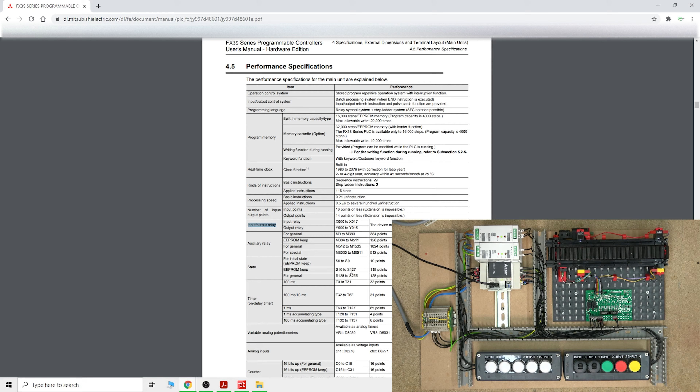Let me move that along now. Let's load up the PLC and have a look at what we are going to be working on today, and also let's load up our FX3S PLC.

Another way to check how many timers you really have, how many of everything you really have available for the PLC - if you go to batch monitoring and let's say enter T0, it's going to show you what is available for this specific PLC. As you can see down here, it goes all the way to 137.

They are not all the same, so definitely make sure - as I already showed you in the manual - they are not all of the same. So pretty much this PLC can have 137 timers. I'll put T98 for whatever reason.

Let's have a look at C0, how many counters - we can only have 31 counters. And in the manual here it will explain what each counter is. There's high speed counters and things like that. We are available from C0 to C15.

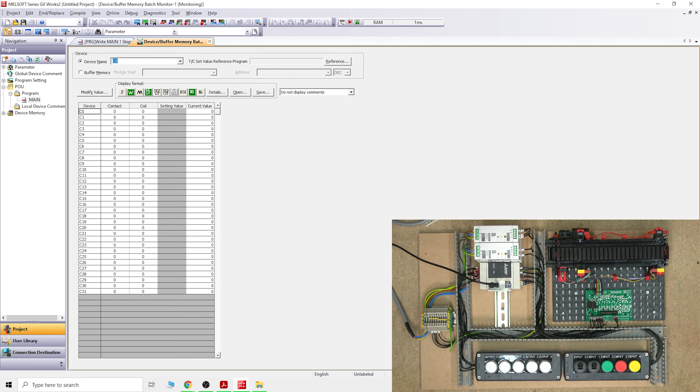We have up counters, and then we don't even have - yeah, we only have very basic. What we can have, basically for general use, is only from C0 to C15. And the 16-bit up EEPROM keep counters will be from C16 to C31. But again, we're going to look at that some other time.

Anyway, we are getting off the subject. So what is our subject today? We are looking into the timers today.

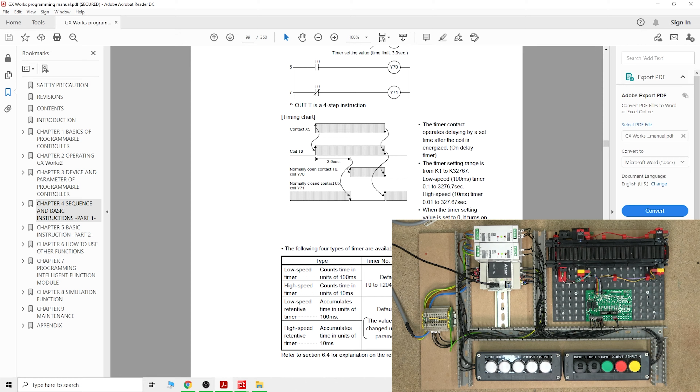And to progress in our manual, this is pretty much the timers in here, and this tells you what's possible and what's not, because this is a general GXWorks manual, so it tells you how many timers are possible, all the way to 2000, which in our controller it's only possible to have 137 timers. So they all differ according to specifics.

So let's have a look how the timer actually works. So for a normal non-retentive timer, this is the one we're going to be looking at today.

If let's say we use M0, and then we type in T1, then you need space, and then K, which is constant. K1 will mean 100 milliseconds. So you need to select the right value - K1 will actually be 100 milliseconds, and if you want to go for 1 second, you need to go for K10 or K20 or similar, since 1 second is in tens, so you can break it down yourself after that.

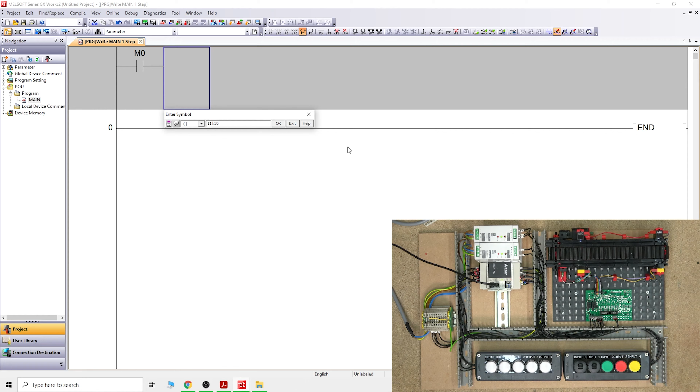So let's go for K30, so that'll be 3 seconds. So once we F4 it...

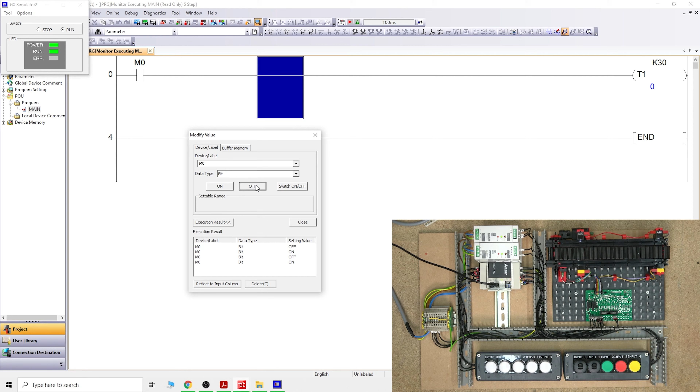So we are going to go into a simulation. As you can see here, if you want the timer to go, it needs to stay on. As soon as you turn it off, it will return back to 0. So, on, and it will return back to 0.

So pretty much every time we want to use the timer, we need to make sure that the bit stays on for it to run, and then obviously it would need some form of way of turning it off. So that's pretty much what we are going to be working on today.

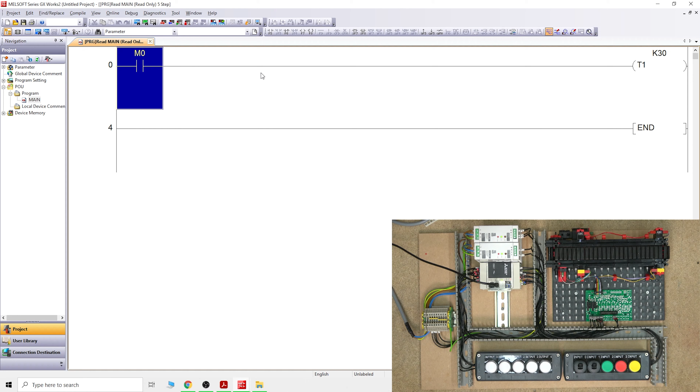So our project starts with, as you remember if you watched the last couple of videos, you know what our X's are already on our little controller in our video. Is it still available there? Where is our video? Yes, let me just lower that one down. There's my little controller down there.

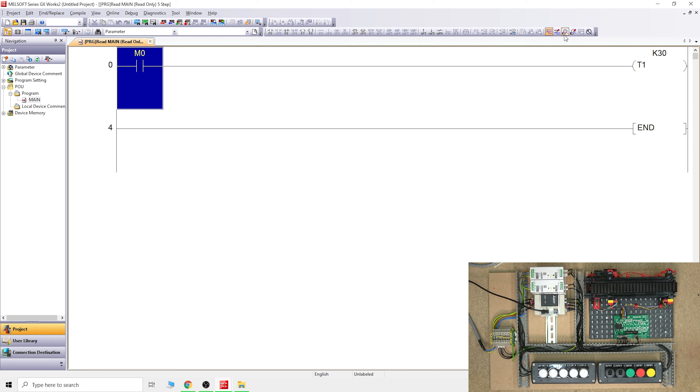So X3 is going to be our start button. Let's go for... no, we need to go to the right mode. There we go. So X3, it's going to be our start, and again, as usual, we're going to be requesting the labeling. So X3 start, let's go with the small ones.

And then we're going to use internal bit M0 for setting it, the bit on and staying on, because we aren't going to be holding the X3. We already looked at the set instructions last time, so if you haven't seen that, definitely check it out.

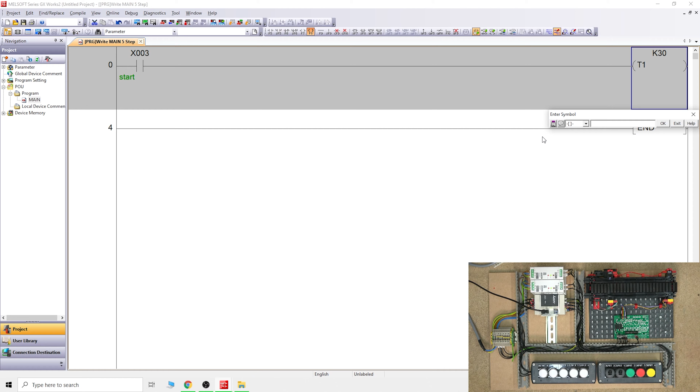So we're going to go for set, space, M0. You pretty much tell it what you want to set. And there we go, so now the M0 is set.

Oh, I forgot to name it. We're gonna call that one as start T0. I'll call it like that. Why not? Here we go.

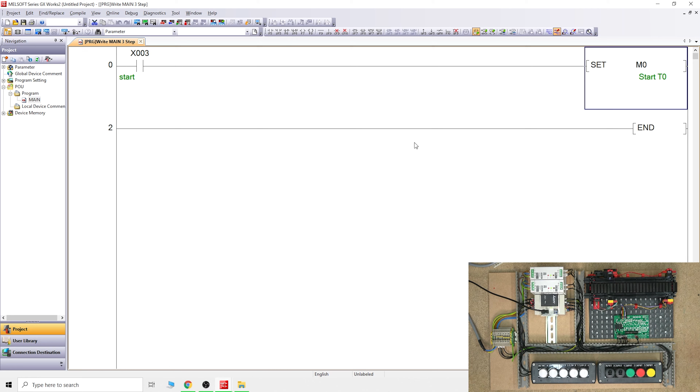Start T, not T0. So the next one, we need to start the actual T0, which is going to be M0. And we're gonna say, we're gonna coil. Remember, the timer is a coil itself, it's shown in the manual. So we're gonna say T0, and again space, and as I said before, how many seconds?

K10 will be 1 second, K20 will be 2 seconds, and so on. So we're gonna say K, let's say 30, why not, so 30, let's time it.

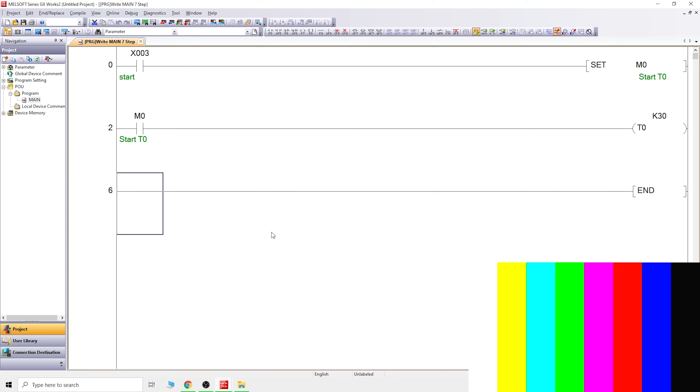So now our timer is on, and a timer can, after it runs out, turn something on. So the next thing we need to do is create what we are going to be turning on. So T0 is becoming a contact now. So that's going to be T0.

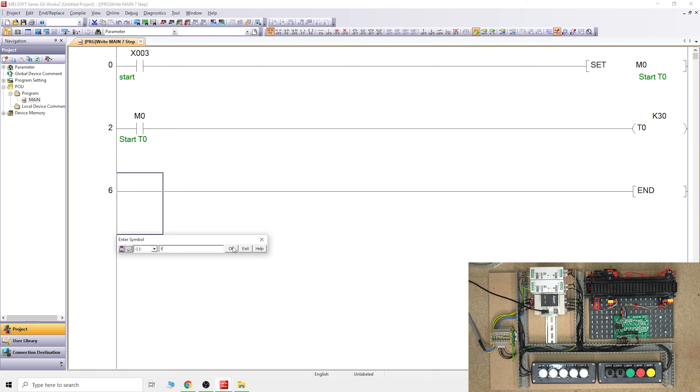And what do we call that T0 actually? We're gonna call it 'start delay on', why not, something like that, just to give us a bit of an understanding of what is going on.

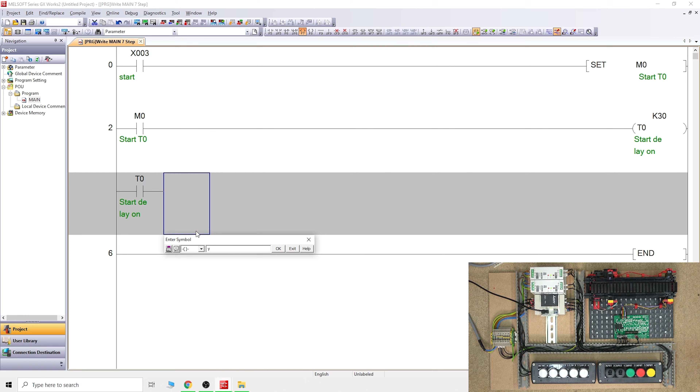And what do we turn on? The actual coil, which is, remember from our last videos, not in there, in here. We're gonna turn on Y0, and that will be our - keep forgetting - that will be our 'run forwards'. Here we go. So that way we F4 that one, and that way we have created an on delay.

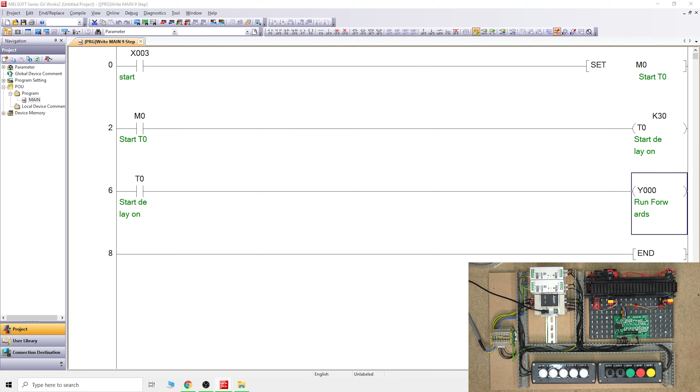Next, we need to create off delay, the same one. To do the off delay, we do exactly the same principle. It's just this time we're going to use X4.

X4, we're going to call it stop. And we pretty much will repeat the same thing. So we need a new different internal bit, actually the contact. So we're gonna call that...

Set probably, let's go for M. What do we have? M1, one we have not used already. So M1, let's click that one on, and M1 is going to be what do we call it, a stop delay on.

And from there on, obviously we're going to use that one, M1, which is already what we have. And what are we doing? We're going to be activating the timer, which is going to be T1 this time, K30, 3 seconds.

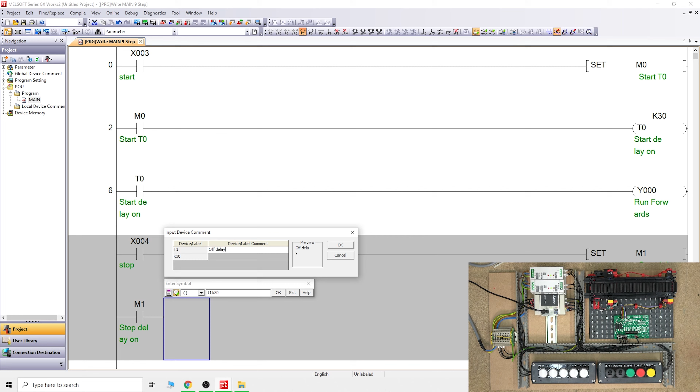Here we go. Off delay timer, let's call it like that. What you call them is down to you. And then T1.

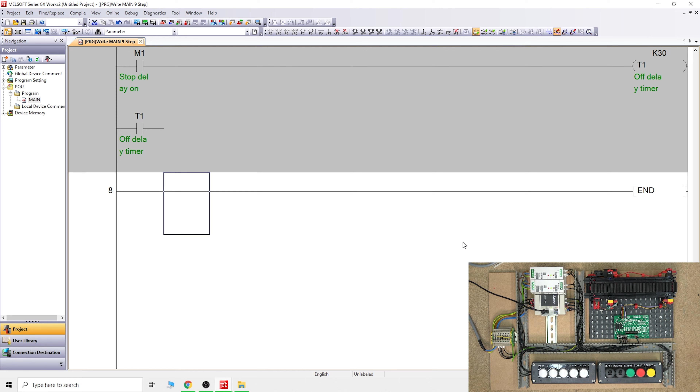No, we need to select the contact, so we're going to say T1 timer. And what are we doing? We are actually going to be resetting the M0, because remember that is still set in there, and obviously we still need to reset our M1 as well.

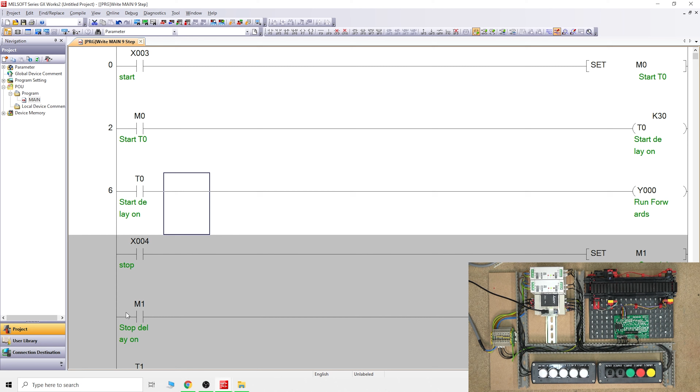So pretty much that's what we're gonna do, because at the moment, as you can see, the set will run the timer and keep the timer on. So we need to reset it to stop the timer and reset back to 0. We need to remove the power from it, or remove the contact of it. So that's what we're gonna do.

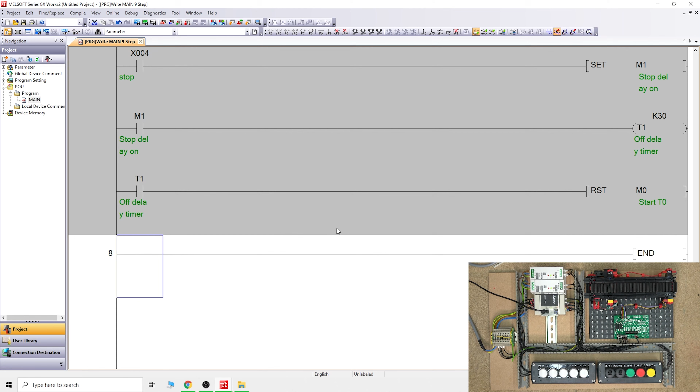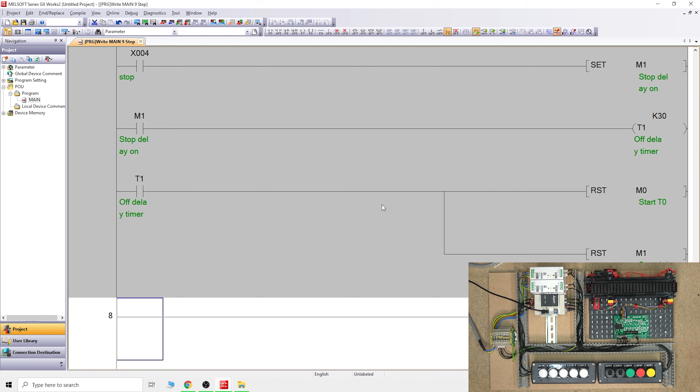We're gonna create instructions called RST, and then we say M0, which is basically M0 to a reset the start. And we are also going to be creating another reset, and that will be for M1. RST M1. So here we go, we already know what that is, and that's, ladies and gentlemen, we have created the on delay and off delay.

So the next thing what we need to do is we need to check it out how that works. And as always, how that works, we need to go to a simulator before we load it into the controller. So let's close that one, there we go, so let's go to X3.

Let's click the X3 on. After 3 seconds, as you can see, the Y has stayed on. So this is basically on delay. So then we need to go for some form of off delay, which we did around it.

Oh yeah, don't forget to turn that one off. And then to turn it off, as you can see, as soon as we click the X4, M1 is set on. And here we go, it has reset the... I need to make sure that one is off. Reset the timer for the start and timer for the stop, and both of them are now completely stopped.

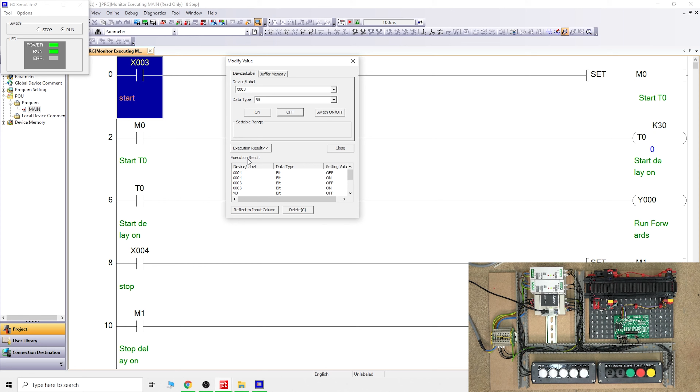So that's how on and off delay is done, and that's pretty much how the timers work. I hope that is explaining you quite a bit. So let's go next to a little station down there and check it out.

And before we do that, only thing we need to do now is send it into the PLC. So there we go, do them. So remember, every time it asks me this little message down there, it's because my PLC is always in run mode, so it asks me to turn things on and off. So here we go, that's that. So let's put it in monitoring mode.

And how much can we see down there? That should be sufficient enough. But sort of to give you a gist to see how that works in live action when you actually use it on a system. So we click the start button. As you can see, the timer is going. After 3 seconds, it will turn the system on. And when we click the off button, it will run for the off delay for 3 seconds, and the timer will stop the belt.

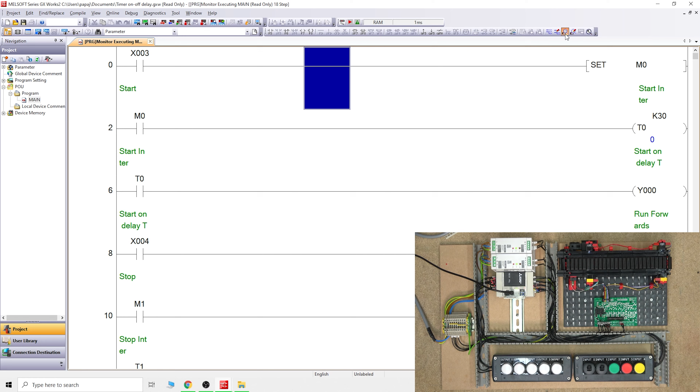Before we go, I'll give you a little small challenge, which is probably not a big challenge, but if you are a starter, it would be interesting to see if you can come up with some sort of different way to do a little project. So I have written a little project which basically, when you turn the machine on, the belt goes for a little bit one way, and then it goes a little bit the other way, and just keeps going backwards, forwards. I'll show you the little project that I have created, and this little project can be done many different ways from what we have learned already.

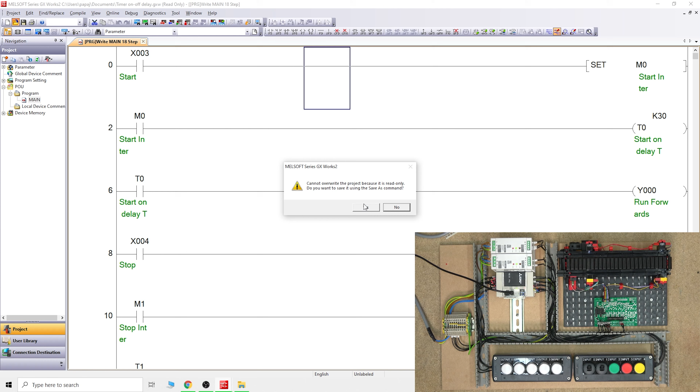Why do you keep asking me all these? I think it's this one we're doing, or this one off delay. No, that's not that one. So it was this one.

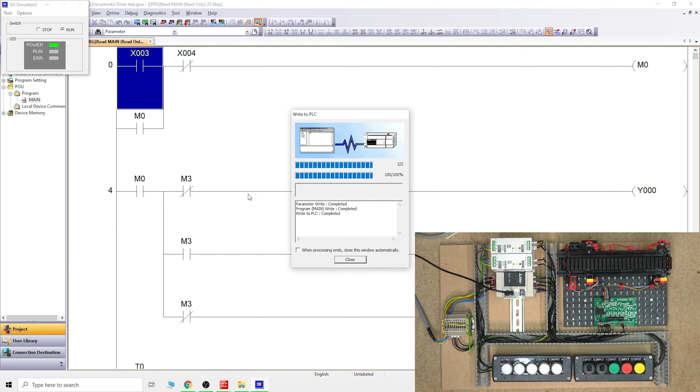So here we go, this is a little project I've created. We have a start button to start the system up. I didn't put any comments on it because I just quickly wrote it up, and we're basically running the system down here. I'm not going to run through all of it because it would be challenging and interesting to see how much you can come up with yourself to create something like that, just to give you a good understanding of how to use the instructions we've learned so far.

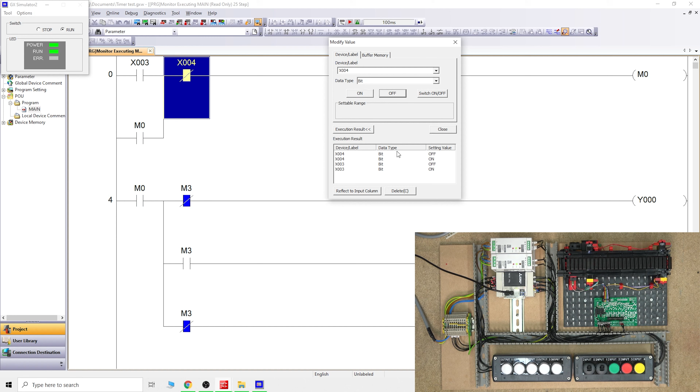So to show that, if you're using GXWorks 2 from the simulator, you should be able to see this function. Basically, as you can see, the belt goes one way, so it goes on, off, on, off. Let's just put it off and turn this on to stop the system. That's a little project I'd like to see you guys create, something like that, just for the challenge, to stretch your brains a little bit. But to see it in action, let's load this in the PLC.

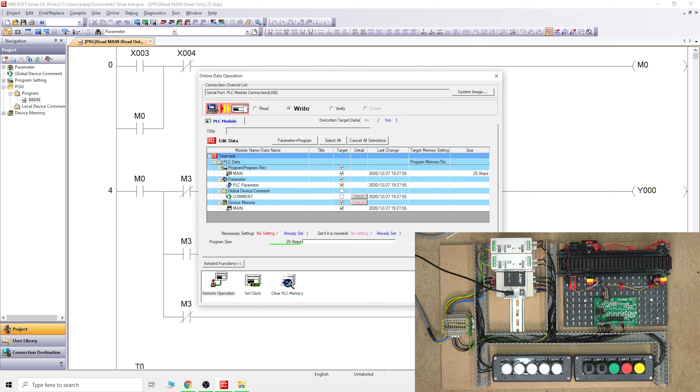It's good to have a training rig like that, because you can really see what works, what doesn't work, and get a feel for it. At least it is for me, not sure how it is for you. If you can build yourself or get these rigs, definitely do it, because when I build projects for myself, often I put it on a belt, and I always come up with all sorts of glitches that don't work, and I iron them out. So let's have a look how that works.

Let's put a little thingy on top of it so you can see. So here we go, that kind of system - it goes one way a little bit, and then it goes the other way a little bit, then it goes one way a little bit, and then the other way a little bit. Just play around with it, so you can get a pretty good feel for how to start creating very basic logic for the systems you are most likely to be working with in the future.

And that will be it, ladies and gentlemen, for the timers. We didn't go into the retentive timers because I think that's a different ball game, a different subject. I'm probably going to do that video a little bit in the future.